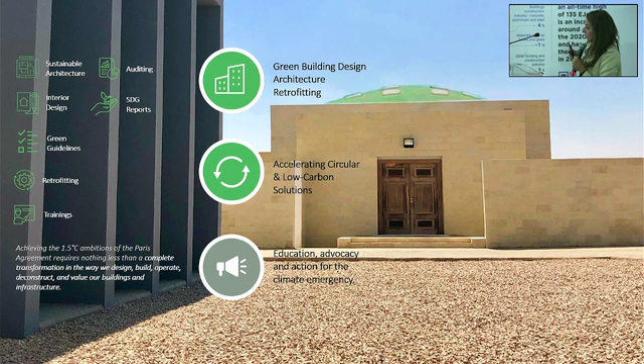Okay, so we do three things. We design, we strategize, or we justify to our clients why they should go green. That's part of our job that we never expected we'd have to do, because we thought it makes sense to build green. The third is that we have an advocacy edge, because we're a new kind of practice, defined as the 4th sector. We work a bit like an NGO and a bit like a private sector company, and we have to advocate. We literally open up the market and step into it.

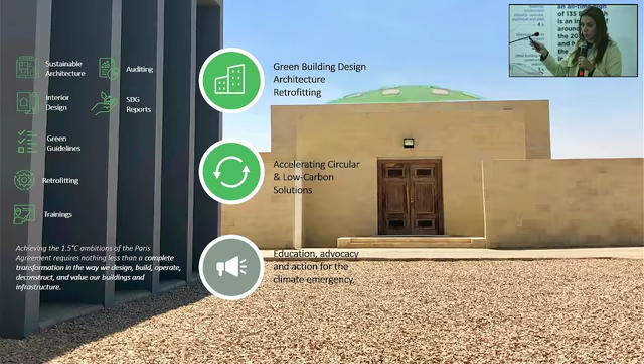We know that we're stuck in a vicious cycle. Things are becoming expensive, supply chains are becoming expensive, rating systems are not adapting, rating systems are not localized. I have a burden as an architect when I walk into a boardroom and say the word LEED, and then I have to worry about the devaluation of the pound, the supply chain of not getting things in, and the premiums from the contractor. It's a lot to ask an architect to justify all this. And quite frankly, none of us have the academic training when we're in university to be salesmen and lawyers and litigation experts in order to design a building.

So we started really small, really tiny, and we never started in Egypt because no one wanted us. This is one of our most successful projects - we said we're going to localize the model as much as possible. This little cafe pavilion is in Palma, and we got the strangest brief, but we were so small that we were the only company that accepted it. The client came to us and said, I want a small building, and I want it out of the way in 3 years.

And you set your ego aside. So for this building, we looked around the area, we looked at the factories nearby, and very close to us there was a factory exporting refrigerator casings - when there was a small bump or something wrong with the casings, they wouldn't go into the market. So we built this entire building out of discarded refrigerator casings. We just thought, why not? That's recycling - I'm using something somebody doesn't want, and it looks slick. And obviously all the wood around was built using recycled wood too.

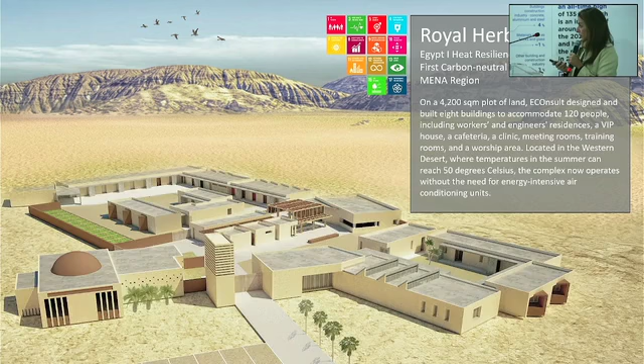Again, a different school - a school that has needs for indoor air quality. We looked at different materials we could apply, and so on and so forth. So what I'm trying to say here is there are no rules, and there's so much that can go into the R&D, and we look at localizing everything.

This is one of our very novel projects. We were thinking, why do green buildings not take off in Egypt, and why is it so difficult to build here? It's because they're not affordable. The market of 58 million Egyptians living a decent life initiative don't hire architects - by the way, it's an entire untapped market. We're seen as a luxury service. So if the market is not going to encompass our sector, it makes sense for us to change and evolve and go to them. And that's what we did.

So we decided to build our first village that's certified, later on carbon neutral, in an off-grid community in the middle of the Western Desert for 120 people. It was us. We used to go to the desert, to the community, and we decided to make the community design with us.

For cooling, we reached up to 10-degree cooling without mechanical assistance, using angles, lifting the building 10 centimeters off the ground, using particular methods of changing the furniture of the room seasonally, because it reaches 45, 50 degrees sometimes, and then in the same day it's 10 degrees.

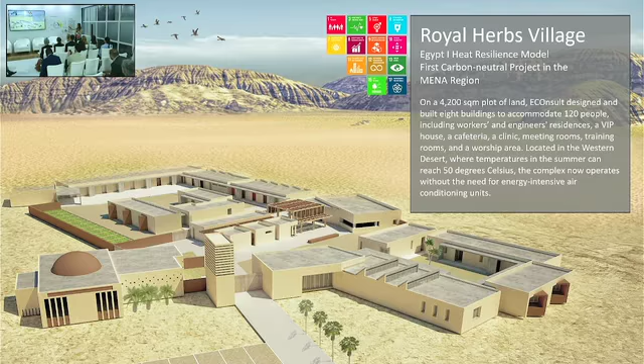So this is it when it's built. We got this kind of stone, called Hagar Arun, all the way from Fayoum. It has a wonderful thermal quality. It's very reflective, it's very cool all the time.

The building itself looks the way it is because it's got a lot to do - it's got the client, it's got the climate, it's got the budget, it's got the energy or lack of energy on the grid, and therefore the architecture comes later on. And we think that these kinds of genuine buildings are going to start becoming more and more frequent under heat stress.

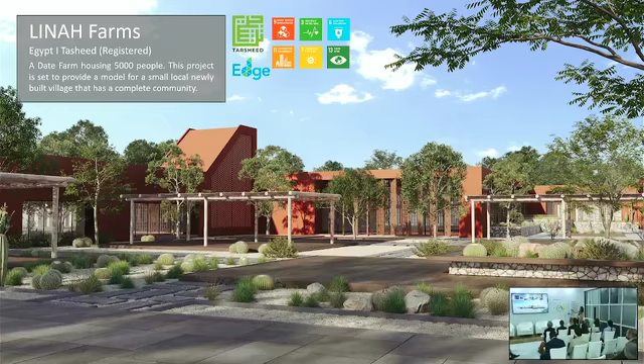We're now working on another project for a community of 5,000 people in Bahariya village as well. A lot of what we're trying to do is explore having affordable and accessible building become the number one product in the industry. Because at the end of the day, it still remains very high-end when we talk about green buildings - Apple, Amazon, all of that. It doesn't look like our income situation, and it doesn't look like a developing economy, and it doesn't look young, and it doesn't look like you come from the desert.

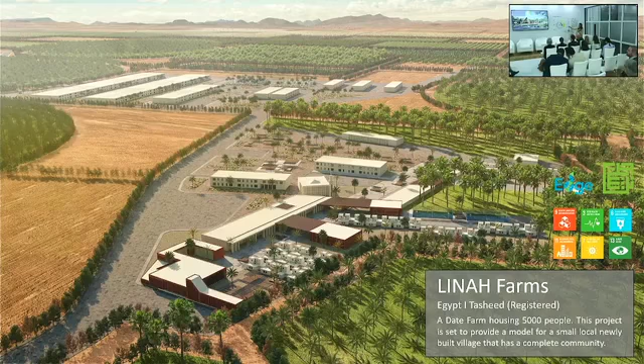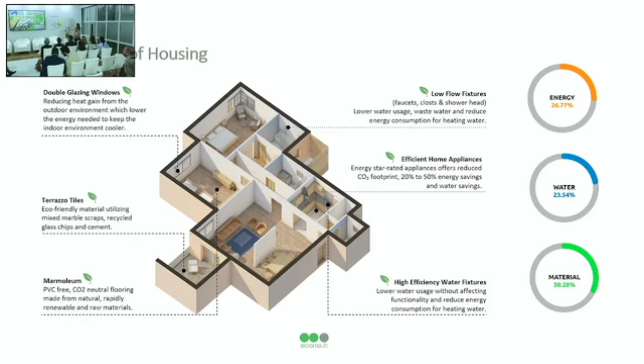So why is this the reference point? That's when we always look onto the rating systems and the localizations of the rating systems. So a product like Tarsheed, we are definitely subscribers, although you said that you made one for now for decent life, so we want to look into that. And how are we going to implement Tarsheed on this kind of level building? This is a hybrid - we've got an EDGE registered school in this project, but also the rest of it is Tarsheed communities. And it's this mix-up, it's this selection.

So what I'm trying to say is simplifying what the economy needs. This is a really interesting brief because I got the price of the unit, and then they told me, go and do whatever architecture you want. It's great that the developer is thinking that's the price of the apartment and this is how much it is - how much can I save?

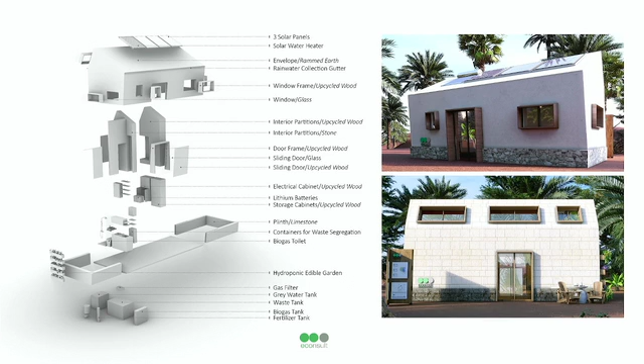And it's true, with the materials you can reach up to 25 and 24 degree cooling. Now we're really squeezing our brains with the team and also considering how to make the tiniest, most efficient house that is suitable for rural communities in Egypt.

Last thing is, last year we embarked on creating the first green guidelines for rural communities that are authored for non-practitioners. Because again, I know how much we can engage with rural communities, and it's quite limited. And we developed something called the People's Brief. And these are our clients - these are the people at the center of the SDGs that we want to do, and therefore the products have to come out. And then we started looking at how do we apply the SDGs on the household. What would it look like?

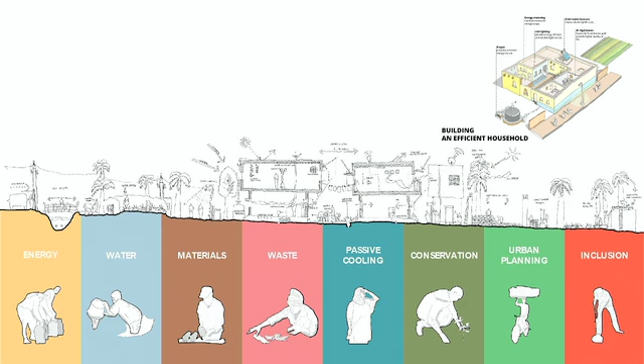We have 8 chapters. It's quite a hefty document, like 150 pages worth of guidelines that have been extracted from the community. As you can see, all of the illustrations in the green guidelines are actually the real community house in Upper Egypt, Lower Egypt. There is nothing that is alien to what is existing - it's just making it work better.

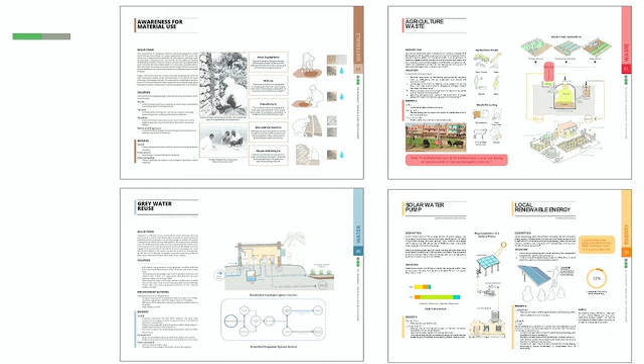And when we applied this rating system, these guidelines, we thought we'd put it to the test. And so this year, we've been working on certifying the first green community village. Successfully, we got the certification from the Egypt Green Building Council, and it's the first of its kind. And I just want to end by saying the case for doing this kind of stuff requires a lot of work, and I think the architects now that are using the case studies are moving a lot faster, and I think the financial sector has to move on with us.

There needs to be investment in intelligent systems in buildings, because we have to move on from calling a building green just because it's a building with a couple of solar panels on top of it. It needs to perform a lot more.

I'm really, really hopeful that we can export this prototype, expand it, upscale it, and this experience, this guideline can become like a content page. And every community in different countries can apply into that content page. So thanks a lot.

Thank you so much, Sarah. This is incredible and very inspiring, and I understand how much it's very challenging working on this in Egypt. I would also like to congratulate you and Egypt Green Building Council on the first certified village, in Aswan. This is an incredible achievement. Thank you so much for this.